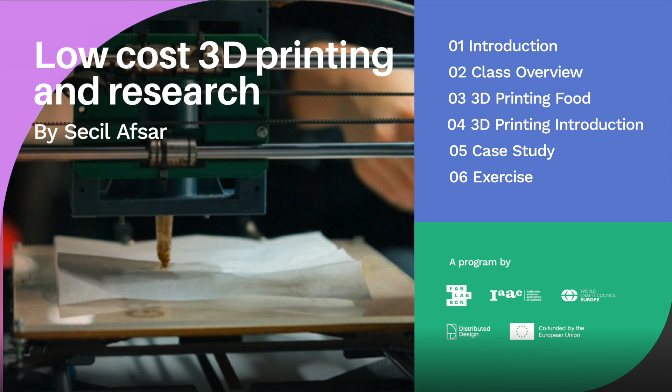Can distributed design help us to tackle the food waste problem?

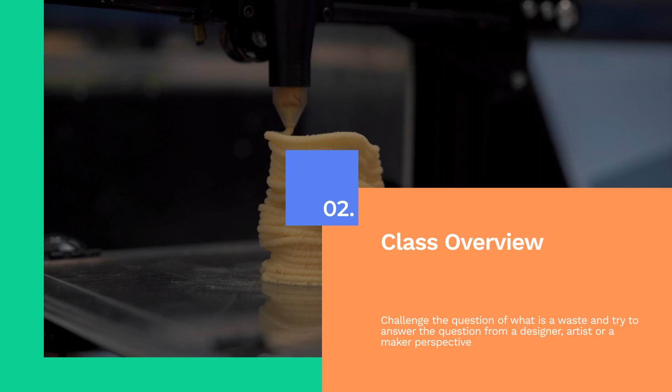Today, we will challenge the question of what is a waste and try to answer this question from a designer, artist, or maker perspective. Actually, we will try to talk about a specific type of waste, which can be seen as more innocent compared to other chemical or industrial waste.

This is food waste. Food waste creates 26% of the total greenhouse gas emissions of the world yearly. And unfortunately, 1/3 of the total food production goes to waste every year. There is a great deal of food thrown away each year, but most of the time they are not thrown away because they are expired.

They are generally discarded by us because they are not visually appealing or their texture is not giving us pleasure anymore. Maybe in the times of our grandparents, it was not that much. They didn't have the habit of throwing food away that easily. They always had the tendency to recook the old foods.

For example, they were making crunchy breadsticks from old bread, or boiling discarded peels with sugar to create syrups, or cooking soup from the remaining food broth.

In addition to these upcycling techniques, when we talk about the visual appearance and the texture problem of the food, we can define it like a banana that goes bad or an apple that doesn't seem that delicious but still contains lots of nutrients inside of it.

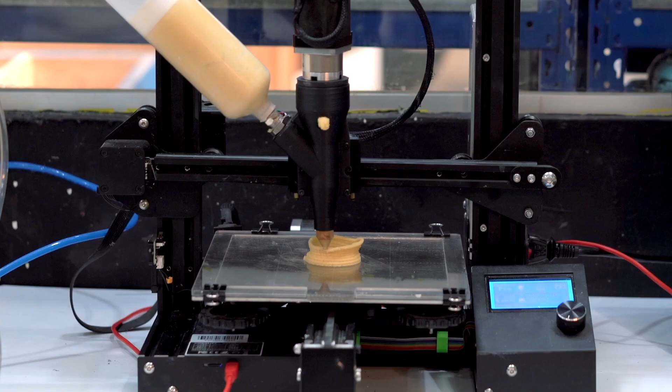Let's dive a bit more into 3D printing food technology. Actually, this technology works similar to the 3D printing process, but instead of using materials like plastic or metal, it uses food ingredients as a printing medium. Food ingredients are loaded into the printer, often in a puréed or paste-like form. And as in traditional FDM printers, the material is extruded layer by layer to construct the foods in desired geometries following the digital design.

The process allows us to create shapes and textures that might be difficult or impossible to create by hand. A wide range of foods can be printed with this technology, for example, chocolates, pastries, or various types of dough. One of the key benefits of 3D printing food is the ability to customize food items in terms of shape, texture, flavor, or nutrition.

In a little more detail, for example, some people have specific dietary requirements, or some elderly people have a swallowing issue. In that scenario, for elderly people who have a swallowing issue, creating a texture that they can easily chew and eat can help their nutrition intake.

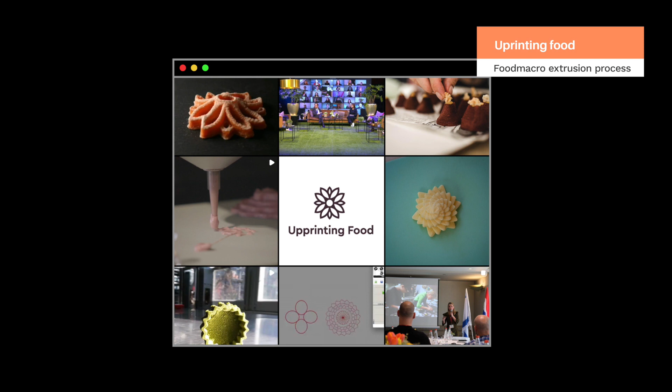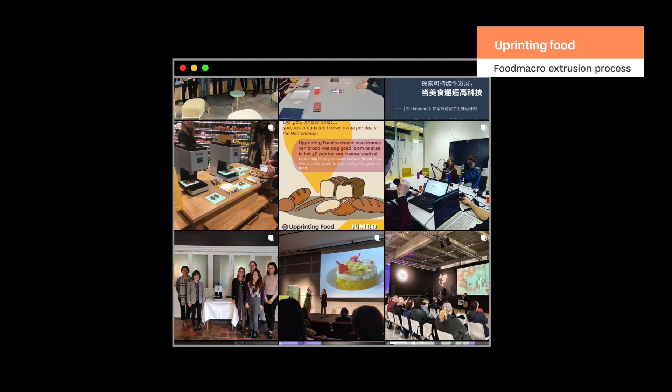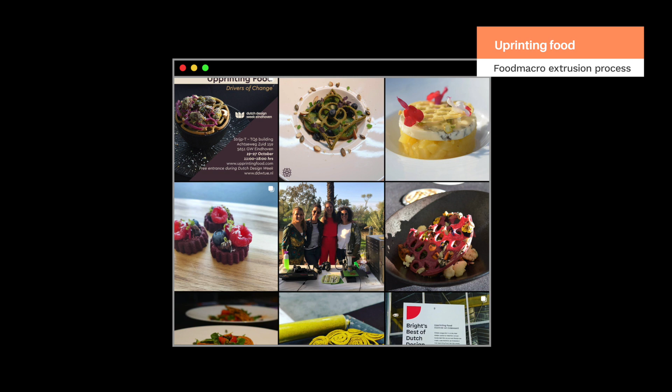Furthermore, regarding the macro design of 3D printed food, Netherlands-based company Upprinting Food collects fruits and vegetables that are not visually appealing and mixes them with old bread to create a paste, like a dough, printing it layer by layer into a shape that becomes more attractive and appealing.

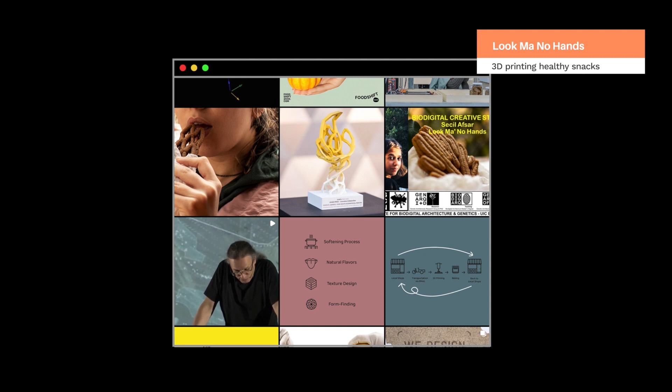The project focuses on using local waste, collecting the peels with cargo bikes from local shops, bringing them to the kitchens to print with these discarded foods, and carrying them back to these local shops.

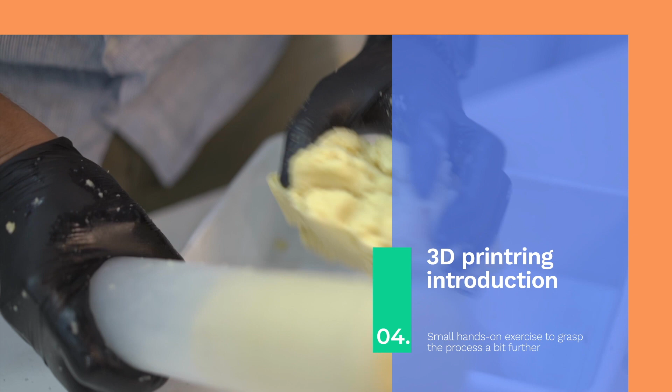Let's summarize the process line of 3D printing food very simply. As we mentioned, this looks kind of like the cooking process, but we need to have specific viscosity and consistency of the material in order to extrude it. That's why while we are developing the taste of the food, we also need to think about the materiality of the food.

We mentioned some of the projects. One of the projects that I developed in 2019, the idea was to upcycle fruit and vegetable peels. The process is actually the same as preparing a dough as we did traditionally in our kitchen. However, this time we need to consider not only the taste of the cookies, but also the consistency of the cookies to make it printable.

When we collect the discarded fruit and vegetable peels, before processing them, we need to brush them softly under the water. You can simply use your toothbrush for this, because during the farming process they can be exposed to lots of chemicals. After you peel off and wash the peels, you need to make them into small pieces. You can use a blender for this process.

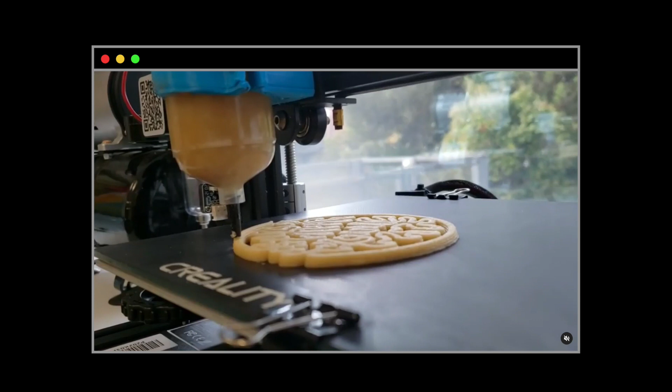All-purpose flour is generally the most popular starch-based flour, but if you are vegan or prefer other types of flour like oat flour, you can go with those too. To make the result chewier and more cohesive, we can add melted butter. As a vegan alternative, we can replace this butter with coconut oil or other ingredients as you prefer.

As I mentioned, egg is very important to create the binding properties of the dough. But if we add too much egg into the dough, we will struggle to extrude the material. That's why even in normal cookies we can play with the egg amount.

Generally, we have different types of FDM 3D printing food techniques. One of the most common ones is paste extrusion. In this, the material is deposited from the cartridge with the help of air or another force, and the piston directly pushes the material out of the nozzle.

The other type of extrusion technique, which is more popular in ceramic or other biomaterial printing, is screw-based printing. In the food printing industry, I see more cartridge-based or syringe-based extrusion techniques, but the advantage of using a screw is that you can follow how much material you deposit by controlling the rotational speed of the thread.

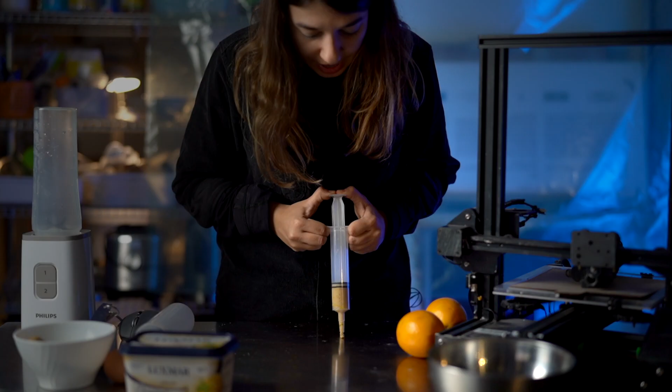Before placing the food paste inside the cartridge, it's always good to test the consistency and extrudability of our material. For this, we can use a simple syringe and see by hand if we can extrude the material in a continuous way. If the material is falling apart and you cannot extrude well, maybe you need to add a little more butter or a little more egg to play with the consistency.

The important thing when inoculating the material inside the cartridge is that you shouldn't leave any air gap, because while printing, if there is any air gap, the continuity of the print will be damaged and there will be some holes in your geometry. That's why preparing the material is very important. The inoculation of the material, the extrusion rates and the print speed all need to be well calibrated.

Actually, we can think of this as a multi-parameter process. You need to think about the nutrition of the food, the material properties of the food, and the machinery process. However, considering the uncountable advantages, as we mentioned, in both industry and our daily life, we should calibrate it well and bring this process line together to carry it out in a better way.

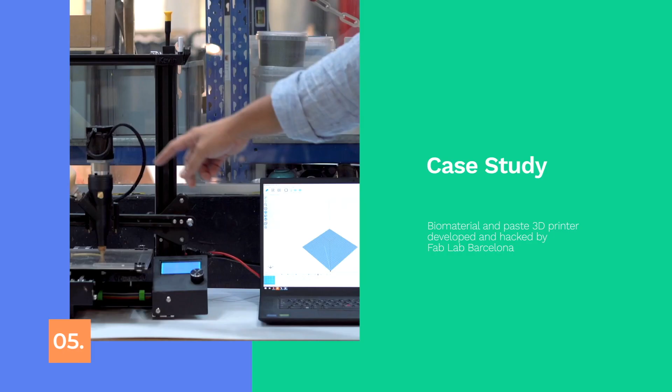I'm Eduardo Chamorro, and I'm going to explain how we're going to use our biomaterial and paste 3D printer that we hacked and produced here. The first thing we need is, of course, the printer itself, a computer, and a cartridge full of material. We need to produce some material to use it.

So we need to take out the cartridge that we're going to fill with material. We have prepared some little tools like an industrial cookie or bread mixer, a spatula, a weight, some glycerin, xanthan gum, basic materials for making a really simple biomaterial for today's test. Let's start mixing. So let's put on some nice black nitrile gloves.

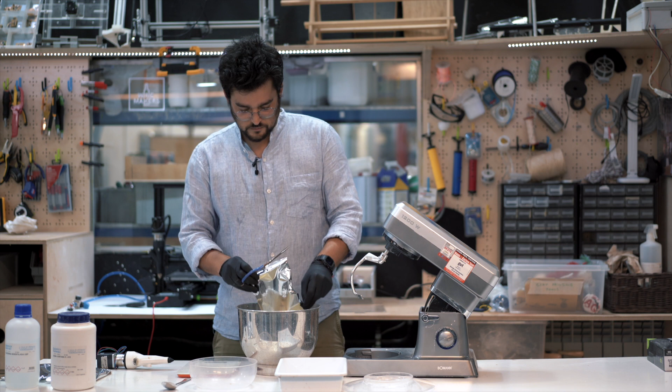We know exactly the total amount of material that comes in these containers. The formulation changes a lot depending on what you are doing, but you always want to have a quite toothpaste-thick consistency. Now that we have here the base biomaterial, we're going to start adding some glycerin.

For that, I'm going to take a scale and weigh xanthan gum and glycerin. Let's put some nice 50 grams of glycerin in this case. Let's weigh this spoon and let's take some 10 grams of xanthan gum.

This will work more or less for half a mixture of most of the biomaterials for 3D printing. Yes, exactly. Okay, so we will need a little bit of water, but let's put it at first speed to mix everything. Water from Barcelona, local water. And let's leave it like this for a while.

So now that it's shaking and all the dough has been mixed properly, let's stop it. Done. Let's open it. And let's put the dough in this little container that we have here. And let's check the consistency. It's nice because it stays like one single block. It has kind of a ceramic or soft clay consistency and has a good cohesion.

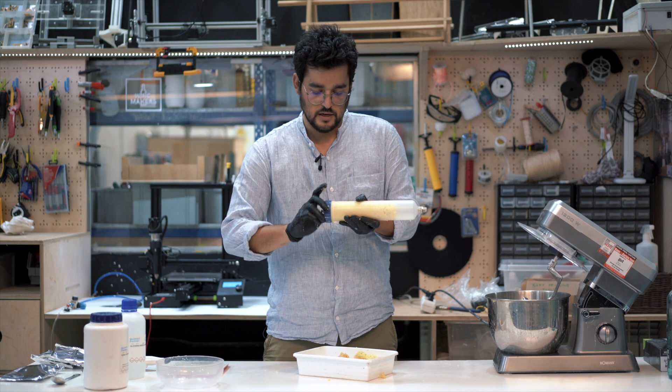Now clean the thread well and put the cap, thread the cap. It should come in nicely and smoothly. If not, it's because you have not aligned the cap properly with the cartridge. Now it's time to jump onto the printer.

Now the whole system is assembled, but we want to show you how to disassemble and assemble it, so you can use it and clean it completely on your own. So the first thing we're going to check is that the machine is completely turned off, and let's disconnect it from the power supply. You will see that the screen still stays on for a while, until all the electricity gets drained by the electronic board.

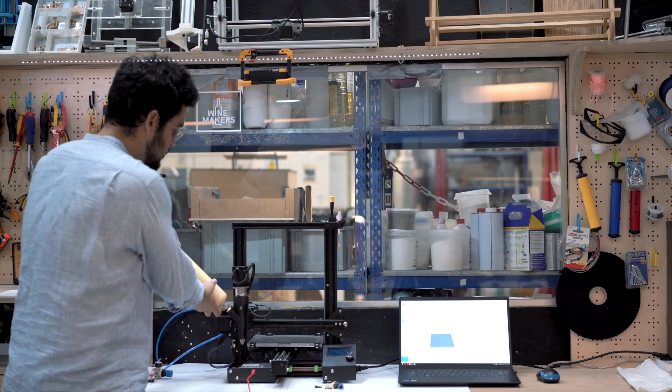So now that it's completely off, we're going to start disassembling the cartridge. Let's turn counterclockwise to unscrew it, so the cartridge is completely out. Basically, we replace the FDM extruding head of a standard FDM 3D printer like this Creality Ender 3 with a custom end effector with an extruder motor and a pressure system that will help us push and dose the material evenly.

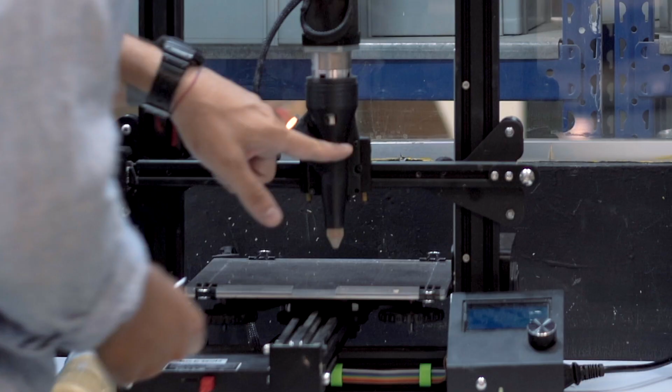You will see that we have different nozzles, so you can change the nozzle type easily. The system that we have produced is just mounted by 4 bolts. One here, just on the bottom, on the left, and a little bit on the top. So with a standard 2.5 Allen key, we can unscrew them. The extruder can fall, so hold it with your other hand.

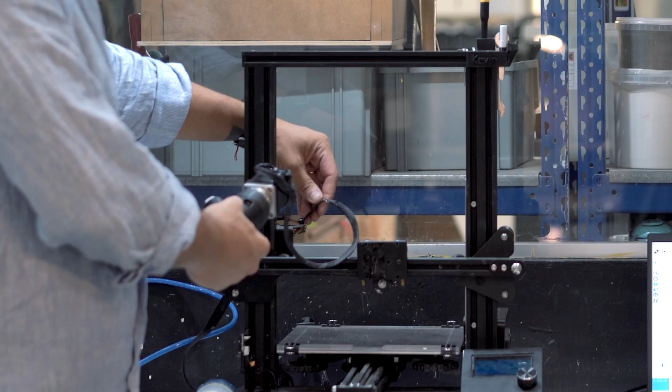And we have our extruder in our hand. What happened? The motor is still connected to the printer. So disconnect the connector, and you can completely take it out. There is a motor and an inlet for the material and the nozzle out. This system is composed of still two components.

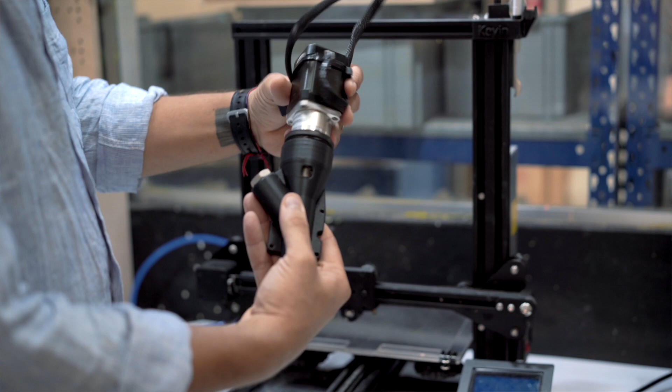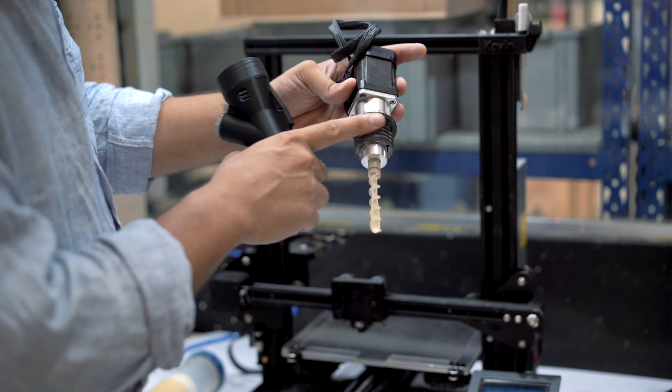The motor, you can unscrew it to clean it, doing some maintenance, or just in case your material got jammed inside because it's too dense. We can see the screw that actually will dose all the material. Watch out with this screw because it's quite thin and it's slightly fragile.

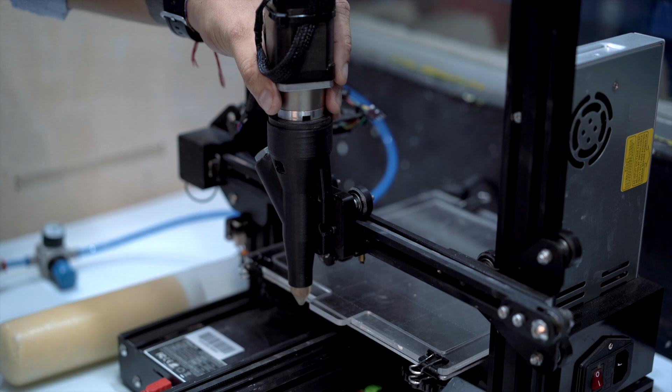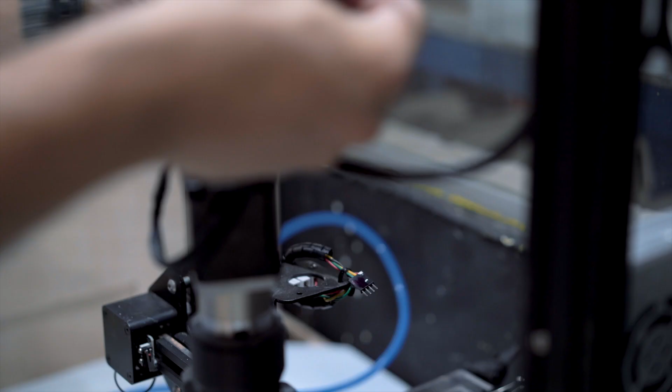As you see, right now there is an adapter plate that will help you to locate 4 screws at 40 by 40 distance, so it's equal, and the weight of the whole extruder and everything is evenly distributed. We are mounting the screws in diagonal. You always mount in cross because that will help to center all the system and distribute the load and the stresses among the material. So let's put the connector.

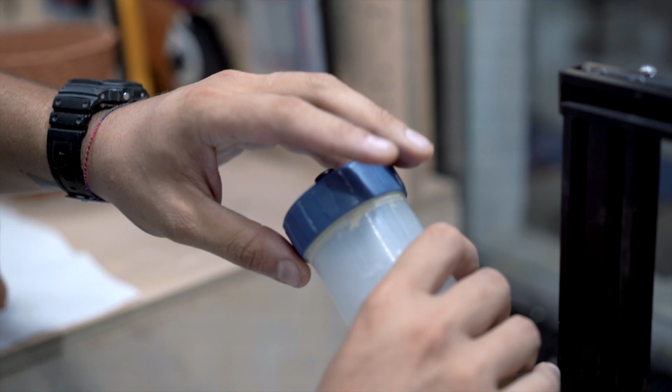Hooray, already. And let's screw clockwise, gently, the cartridge. It should come in completely smooth. Be sure that the cap is sealed. In here we have our compressed air pipe. In our case we have a valve to open the system and an air gauge to tell us the pressure. So let's put the connector on top of the cartridge.

This cartridge is rated to a maximum 6.5 bars. That means we cannot use it at more if we want to be safe. Normally, different biomaterials have different pressure range for printing. Even ceramics, depends on the water content that you mix your clay with. It's always good to start in 0 and start increasing the pressure until you see that actually the material gets compressed and the piston moves the material down completely.

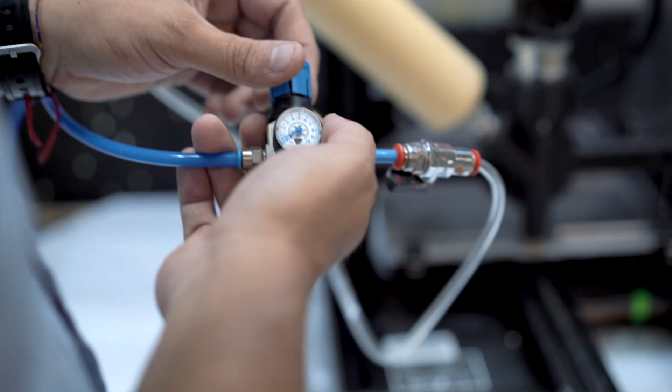We have our gauge at 0. We're going to open the valve. You see the system pressurizes a little bit, and we're going to start rotating clockwise until we see that the gauge is increasing. 1 bar, 2 bars, 3 bars. We know already that this mixture is going to be printing really well at 4, 5 bars. Let's keep it at 4.5.

Okay, so now it's time to connect the machine to the computer. For it, we have a mini USB cable that is connected to the machine and a standard USB that goes to our computer. Our choice of program for controlling the machine is Repetier-Host. It's an open source program that allows to control the machine, move it in X, Y, Z, move the extruder to extrude a little bit of material, and also allows us to put the G-code file that we're going to print. So we need to click on Connect.

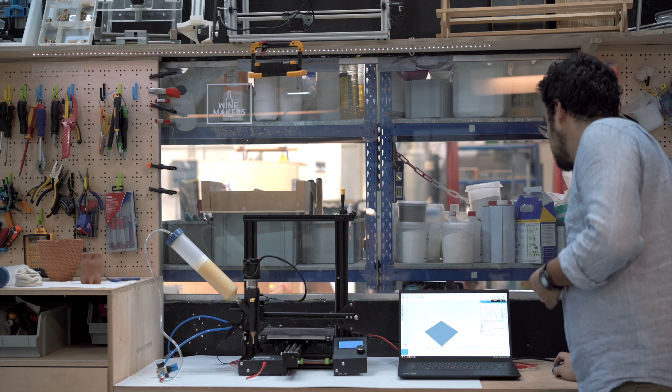If the machine is not connecting properly, you will see, because the machine is not resetting, as you will see in the LCD screen. In that case, you might need to install the drivers for compatibility on your computer. Now we're going to jump onto controlling the machine. We're going to move up the machine, moving Z up.

And what we can do is extrude a little bit of material to check that the machine is loading the material properly. We can see that right now we are making a starch potato spaghetti coming out, and that's nice. Let's home the machine. It will find the origin set point for the X, Y, Z axis. We can cut the potato and starch leftovers of the extruder, and we can launch our file.

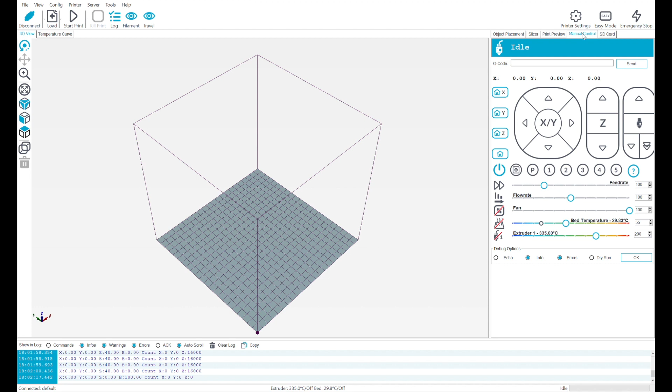For that, we will go onto print preview, edit G-code, and we're going to paste the lines of the code here. I have already made up this file with a custom Grasshopper component where we also have a setting for Cura and other slicers. So in our case, we will paste here the G-code file that we have created with, in this case, Grasshopper, but we also have a compatibility for Cura and other slicers that we have made to make it easier.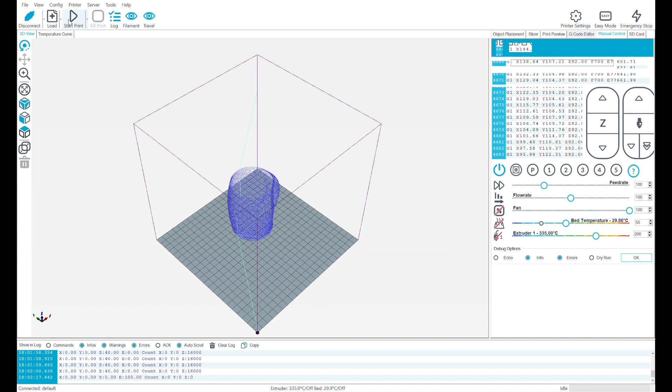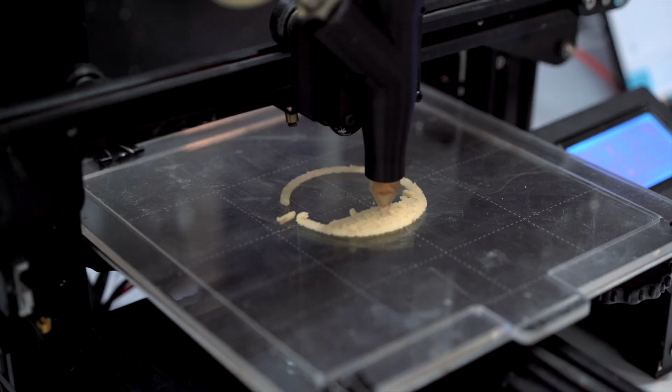And now we can just click Start Print to start printing, and we can see that here on this side we have the feed rate to override the speed and flow rate to override the total amount of material that we are printing. Right now we are printing the base, so just a small cup, it's a circle. Usually the first layer is the one that looks quite ugly, but the second one is there for helping on the aesthetics and also for increasing the stability. You can see the line that we are printing exactly on time.

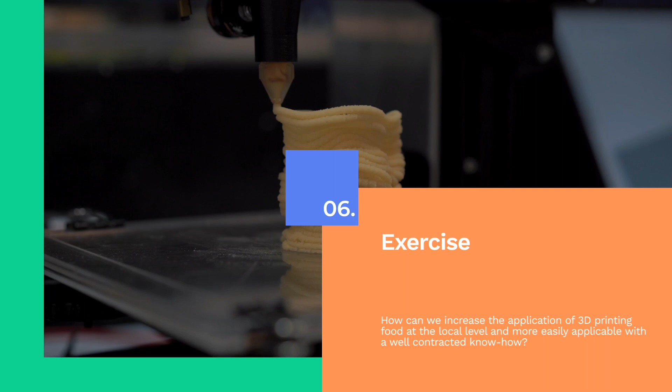To wrap up the process, I would like to ask you some questions. For example, the initial topic that we talked, are you upcycling your food? Do you have any memories from your elderly parents that they use some techniques to develop these upcycling habits? Also, in the modern times, do you think 3D printing can help us to spread this habit across the world?

And would you like to prepare your own recipe, a cookie recipe, and manipulate little by little your butter and flour amount to create your own 3D printable paste? Even if you don't have the know-how of developing digital design, or you don't have the machinery, maybe you can buy a simple syringe and create your own shape on some cooking paper and test and try if it is different in taste and texture compared to your everyday cookies.